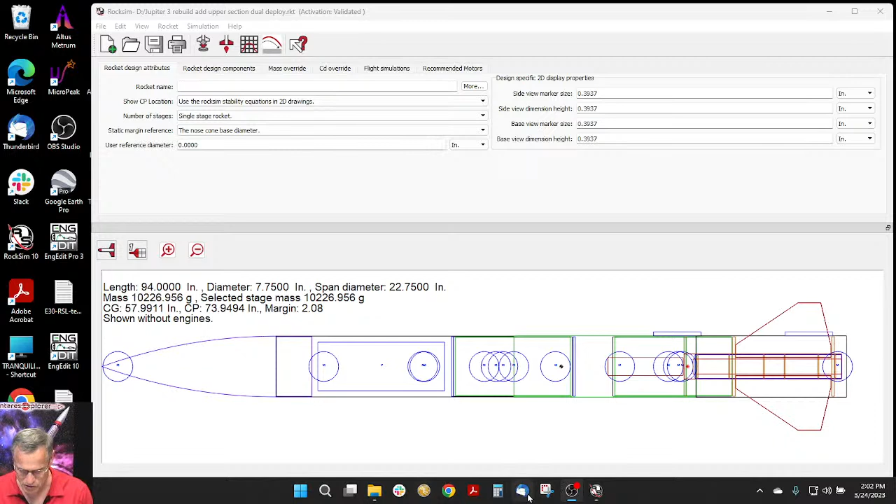Let's go to the Apogee website. Our website is apogeerockets.com. And I don't know, level 2. It's not showing up here. But it is, the page is on our website, it's just hidden. And I would have to make it live.

I could actually do that because I got my other computer over here. Let's see how long it takes me to do it. I have to log in. Type in level 2. And let's turn it to make it active. All right. It should be active here in just 1 second.

All right, let's try it again. Let's try doing level 2 again. There it is. Look at that. So if you just type in level 2 here in the search bar, you'll find the web page for it. Yeah, so this is what it looks like, which I just showed you. And if you click on it here, this was last Saturday.

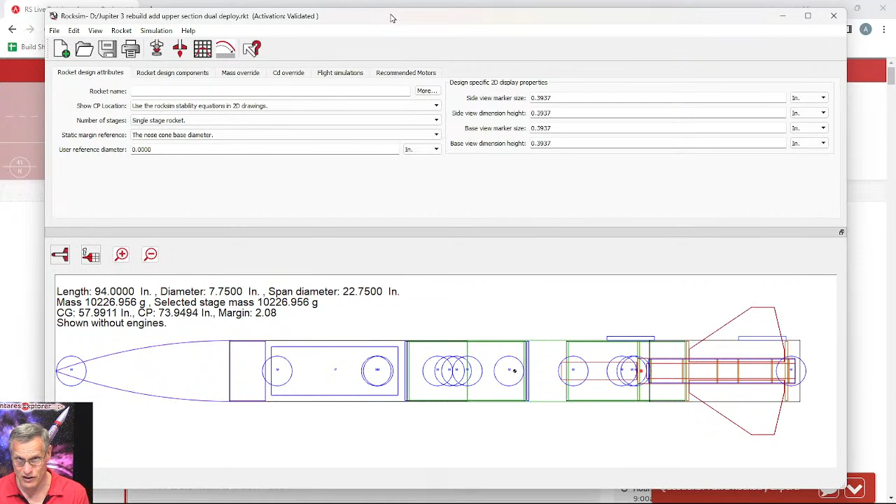RockSim is more of a trajectory program. If you already have the coefficient of drag, it can give you a better trajectory of that rocket. But you have to know the coefficient of drag first. RockSim will try to estimate the coefficient of drag, but it's not as accurate as you want it to be, just because figuring out coefficient of drag is so hard. Even NASA has a hard time doing it. That's why they still build wind tunnels and build prototypes before they go into production. They've got to verify everything, and one of those is coefficient of drag.

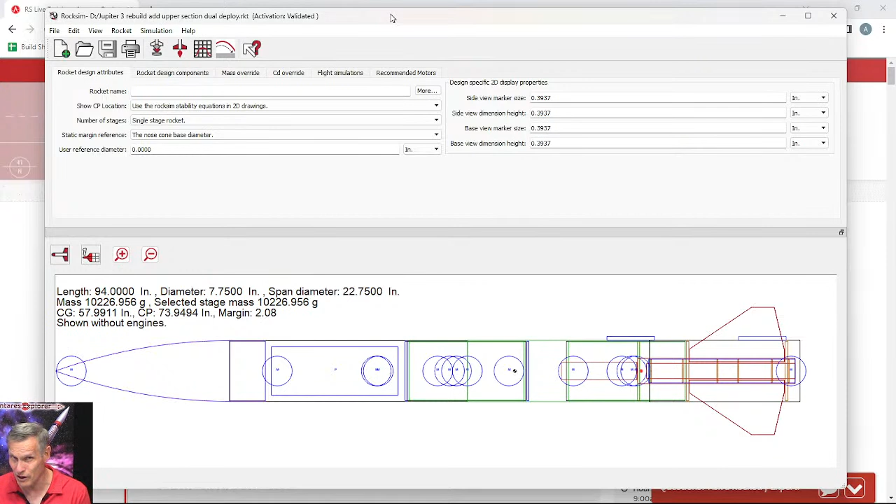And coefficient of drag is not a single number. It depends on a lot of things, like the speed of the rocket, the angle of attack, the shape. Is there a lot of interference, kind of like turbulence coming off of other parts that affects the part you're interested in, like on a boat tail? By the time the flow gets to the boat tail, it's probably already turbulent, and turbulent is different from laminar flow. It's just so hard to predict all that. So that kind of answers the question.

His second question is, if we manage to measure drag differences in shape somehow, is there a place in RockSim where we can put the coefficient of drag per part? The answer is no, not per part. You can do an overall drag coefficient, but it's not per part. If you wanted to do an overall drag coefficient, it's right here under CD override in RockSim. You just hit that tab. We have this rocket, and you have the CD for the sustainer alone, and then CDs for other parts, like booster stages. So it's a set of components, like a booster stage.

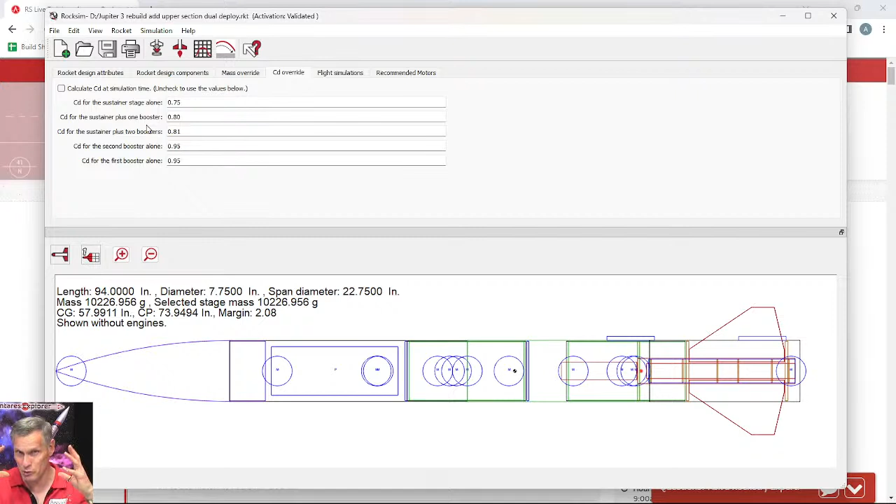Because as parts drop off of your rocket, you need to adjust the coefficient of drag. And I was just thinking about a new feature, and all of a sudden, how to add the feature just visualized in my head. So that was cool, Carlos. You just kind of triggered me with a new idea.

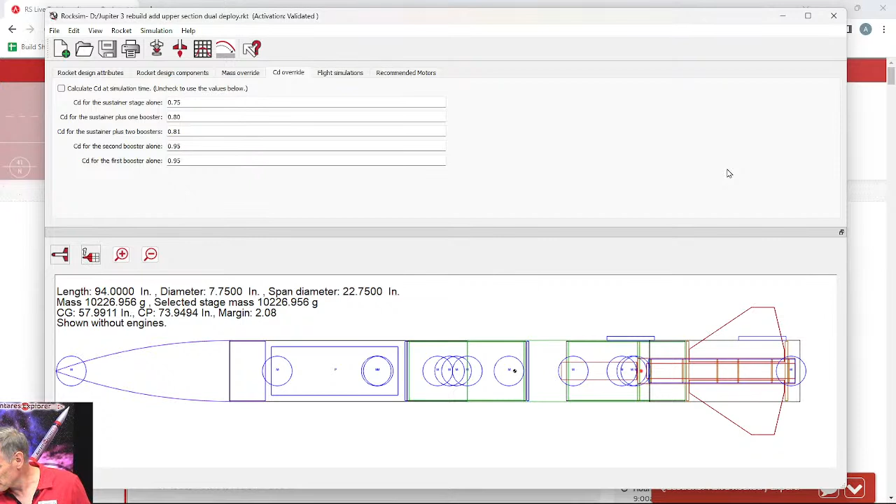We have Newtons per second, who is also here from Massachusetts. He writes, I need help with manually adjusting the CD override. So that's this right here. I built a custom rocket, Jupiter 3, and he sent it to me, and that's what it looks like. If we go to Rocket Design Attributes, let's give it a name, Jupiter 3. That is in article number 564 of your newsletter and secured my level 2 certification. So he's saying this is in number 564 of our newsletter.

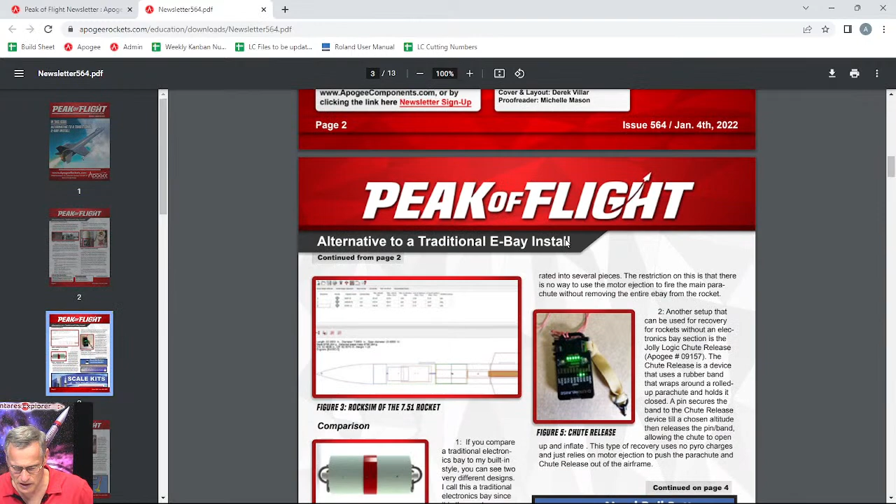So if you go to the Apogee website, go to How To and Guides and come down to Peak of Flight newsletter, he says it's in issue number 564. So you click on all newsletters, then scroll down. I'm looking for 564, and I am looking for the Jupiter 3 rocket. Okay, so it might be that one there, because I don't recall.

And just looking for the name Jupiter 3 as I'm scrolling through this. Let me scroll back up. All right, it's written by Joshua Drummond. Joshua didn't send me a photo of himself. He lives in Massachusetts. Coincidence with the Newton thrust for newtons per second.

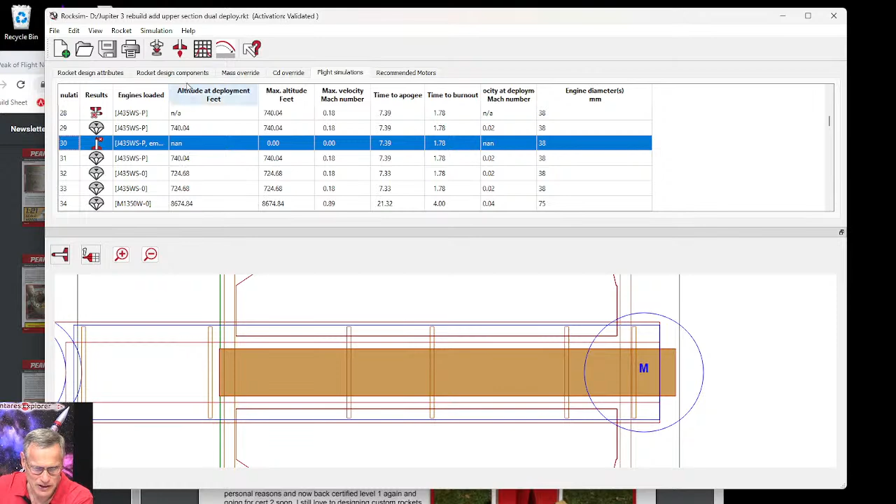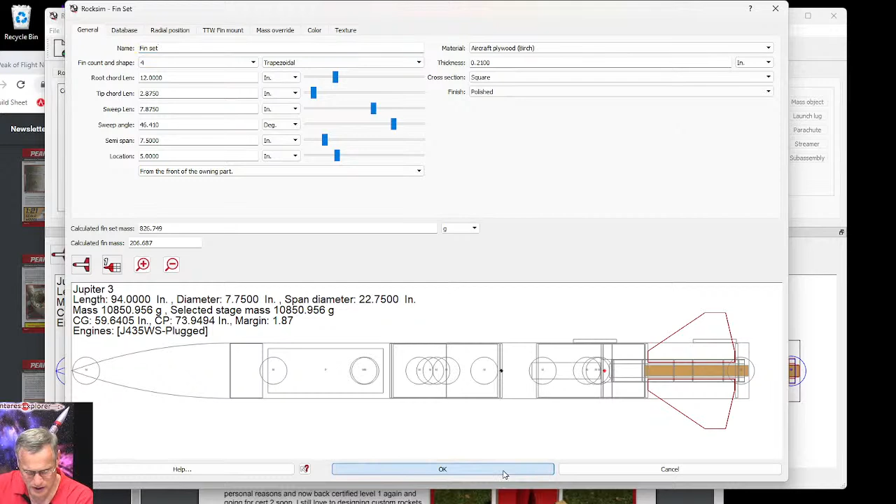So one of these parts is making us problems. And the only way to figure out which part it is, is to start deleting things and then see what causes it to work. So let's delete that. Yes, and then you run the simulation. Okay, still not working. And you go back here and you delete this. And then you run the simulation. Still not working. Let's delete the fins. Delete, yes, and run the simulation. Still not working.

See that? Oh, I guess it did work. It actually did work because it went 574 feet. I thought that was NAN. My eyes didn't catch that. That's NA for altitude at deployment, because it's not deploying because the parachute has no ejection charge to push it out. So let's open up a new design.

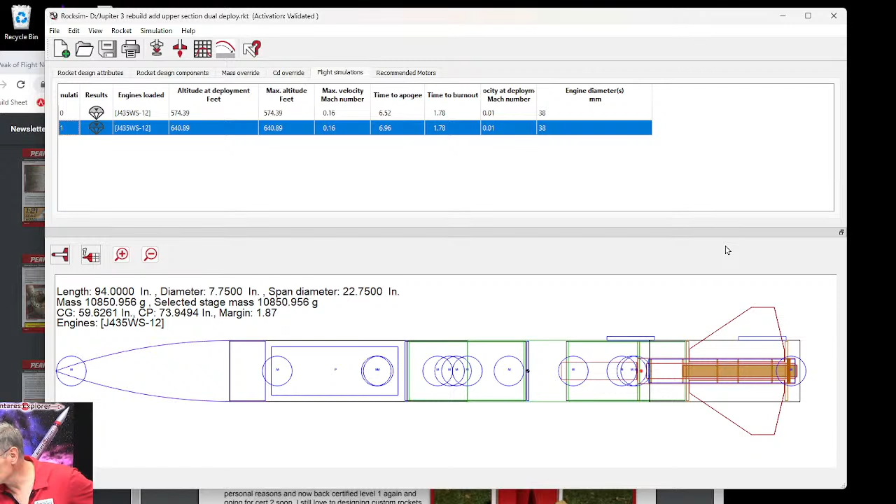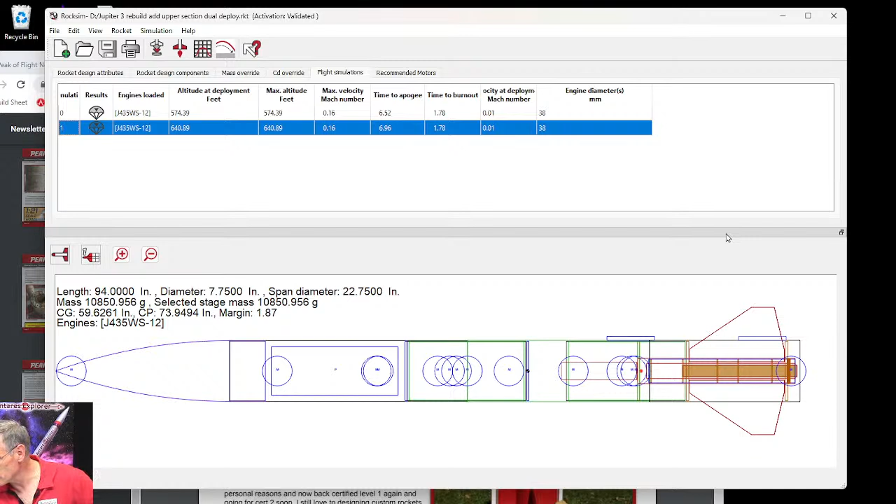It's got such a lot of stuff going on here in this text. My question is, does RockSim overestimate simulated altitude checking the CD override on with bigger diameter rockets? It shouldn't matter what the diameter is, except if it's short and stubby, because then you get a lot of base drag. This is going to have a lot of base drag just because it's big, but it's relatively long. It's more than 10 times the diameter. If you take 7.75, multiply it by 10, you get 77.5, and this is longer than that. So this is generally a long rocket.

Yeah, the question is, how accurate is RockSim calculating it? And this goes back to the very first question we had: is RockSim a CD calculation program? And the answer is no. It gets you in the ballpark. I mean, these numbers are in the ballpark. It's not like 10,000 feet versus 500 feet. So we're in the same area. It's just, now you're looking for like precision altitude. So now what you have to do is actually go out and fly it.

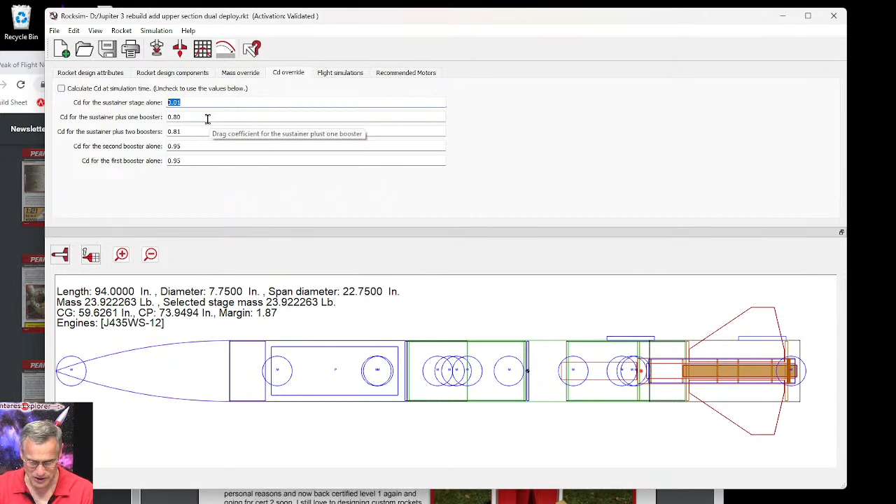Typically, for a typical rocket, you start at 0.75. That's just kind of like our starting point. That's the rule of thumb. Start at 0.75, and then we either work up or down from there. So if your rocket is going too high, then you increase the coefficient of drag. If the rocket's not going high enough, you lower it until it matches. So if I could get this number to match the altimeter, now I have that coefficient of drag

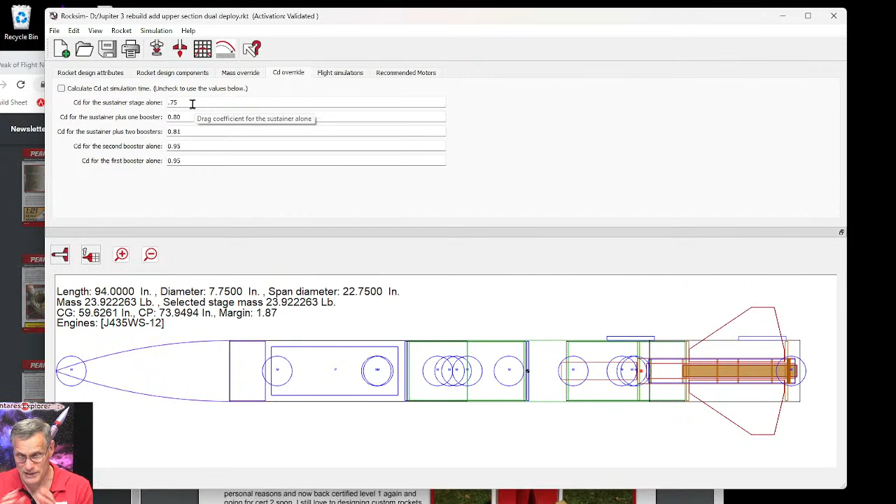pretty close. Like I said at the beginning of this episode, the coefficient of drag is not a static number. And what we're trying to do here is to force it into being a static number. But it's not. So let's run it again and launch it. 640 feet. So this is like the first one again.

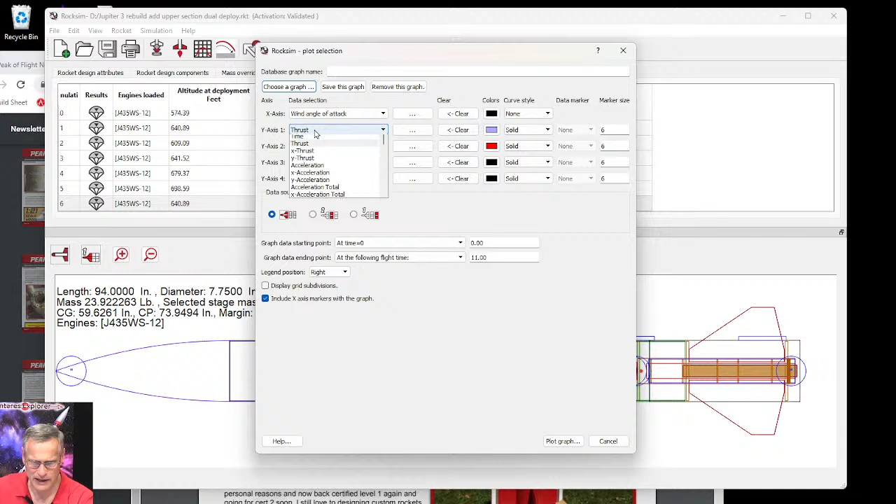If you go to plot over here, let's change the axis to wind angle of attack, and then we plot the CD. Let's clear this one. So on the bottom, we're going to have angle of attack. And when we plot the graph, let's see what it looks like. Okay, so CD is the blue line.

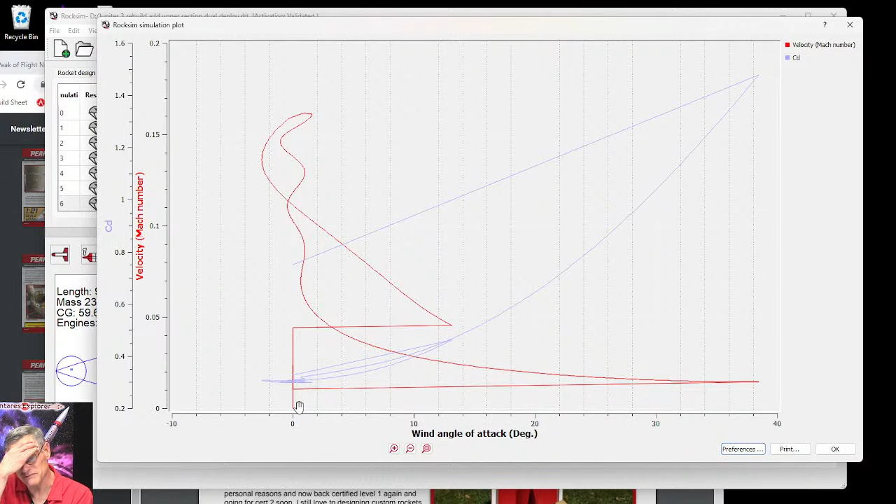Okay, so coefficient of drag is such a hard topic to talk about, and everybody wants to be so precise, and I understand that. You've got to worry about your waiver altitudes, and you can't break the waiver. So if your club has a waiver to 5,000 feet, your rocket can't go above that, or the club could get in trouble from the FAA. Because they have to keep rockets away from airplanes, and if you say I'm below 5,000 feet, then the FAA will have the airplanes fly higher than that, and they won't allow them to fly lower. So it goes both ways.

He says the design is for the L1000. Yeah, this is what happens when you write long emails. I get confused.

But what I said was right, that's the way you do it, and you were doing it correctly: you adjust that coefficient of drag until you can get as close to the altitude that your altimeter said the rocket was flying. And then fly the rocket, and your predicted altitude and your actual altitude should be closer. They're not going to be exact, because the rocket never flies the same way twice, because the wind is constantly changing, or you angled it into the wind or with the wind or in a different direction to compensate for the wind. And so now all your angles of attack change.

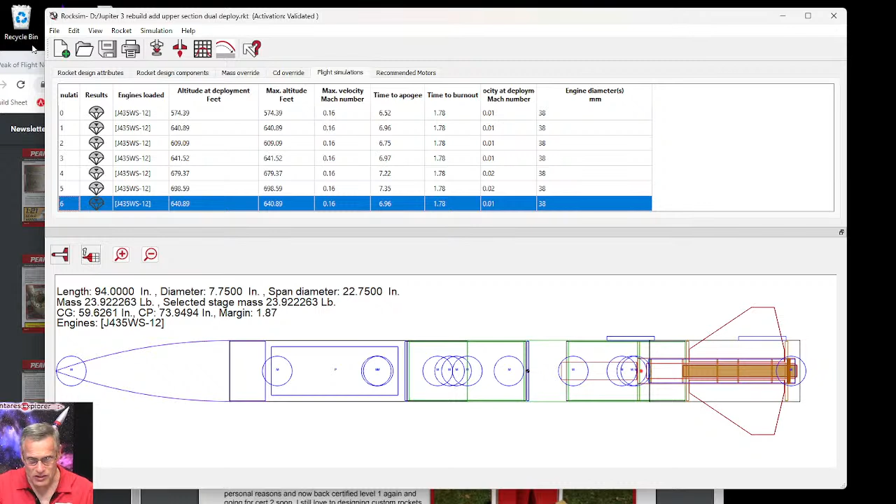Carlos says, will Apogee be selling an electronic recording device called the RockSim calibrator that gives us the numbers to get a correct CD? Well, they're called altimeters, and that's what we were talking about here, is you use an altimeter. But this is what a lot of people have asked for, is can you connect your altimeter directly into RockSim? And that would be really hard. It's not impossible, but really hard.

One thing we would have to do is make a specific altimeter that speaks the similar language to RockSim, because the way data is stored on altimeters, every altimeter stores the data differently. If you think of it like a spreadsheet, column A might be time and column B might be altitude, but a different altimeter might have those reversed, or they might have acceleration in column A versus column B.

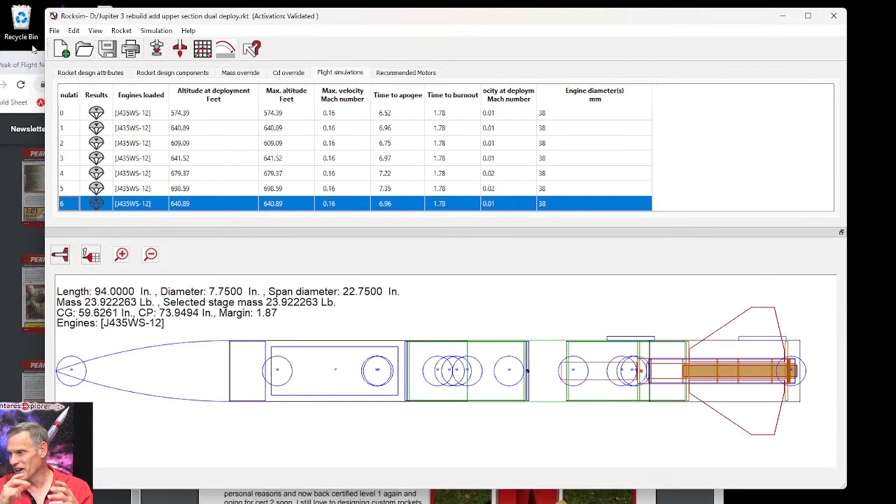And so a future version of RockSim would need to know exactly where the data is. And the only way to make sure is to have a dedicated altimeter that's designed specifically. And Carlos calls it a RockSim calibrator, which is not a bad name. So then you would input an altitude in RockSim, and then RockSim would have to have a little program that would adjust the coefficient of drag until it matched that altimeter reading.

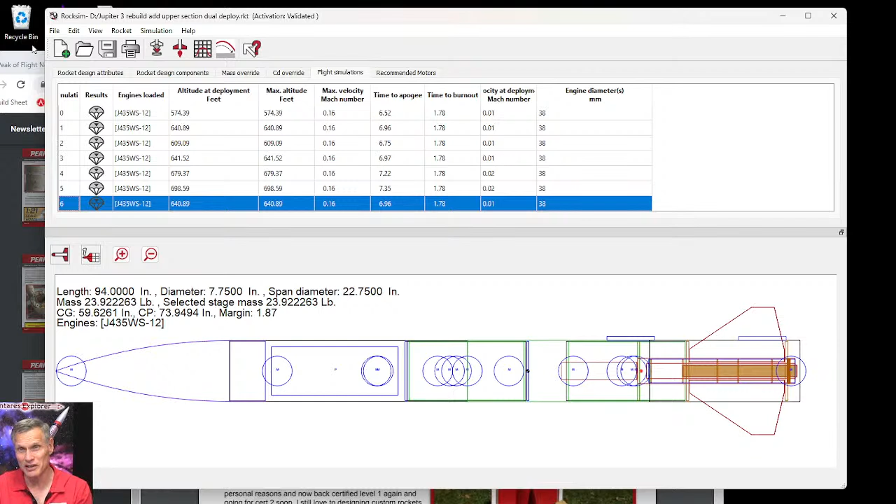The easier part would be just to have that little algorithm already built into RockSim, and this is something that we are thinking about doing. That would find that coefficient of drag, the CD override value here.

It wouldn't be perfect, like I said, because every time you launch the rocket, it's different, because there's different wind conditions, different temperatures, different barometric pressure. Your launch angle might not be exactly the same. Where you launch will affect it. If you launch at the equator versus at the North Pole, that's going to make a difference in altitude. So there's a lot of stuff going on.

Terry says TMI, which means Tim mentally incapacitated. Oh boy, I think it's gotten that bad. All right, cool.

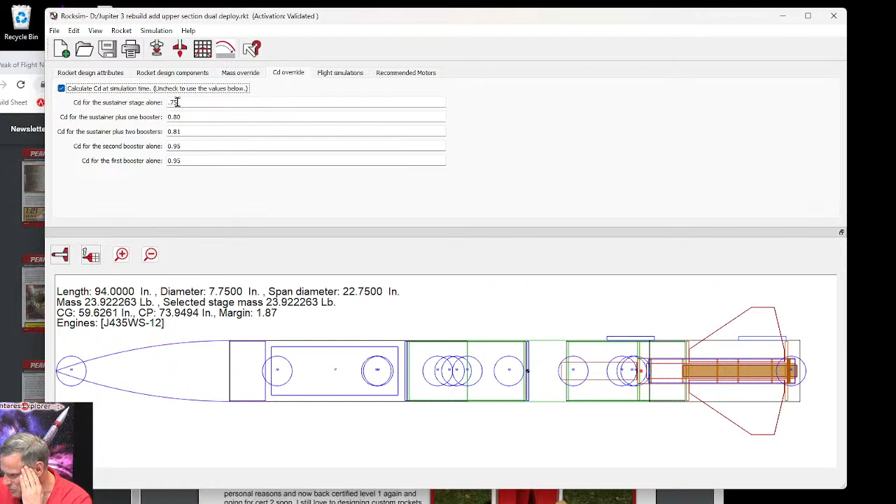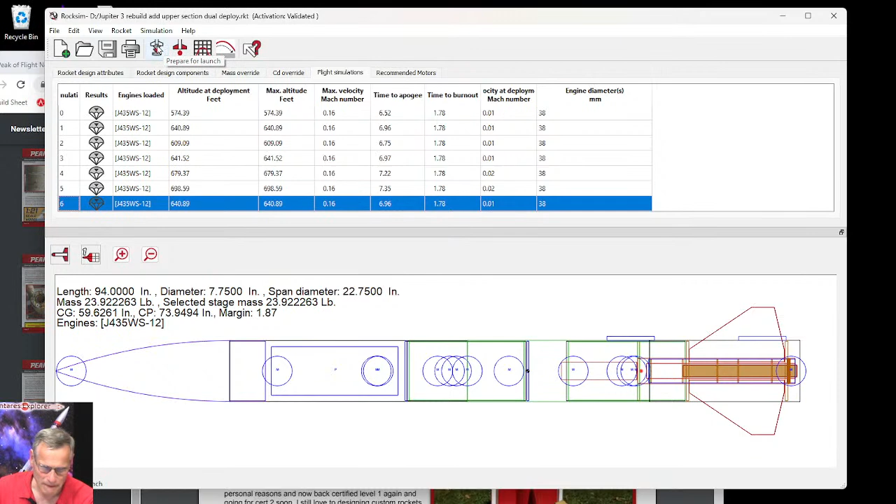Newtons per second says the I-1000 was showing 2,900 feet or 4,500 feet unchecked by the CD override. Oh, that was not an I-1000, an L-1000. Okay, so let's unload that. Let's go here. It's showing 76 millimeter, but we can show all the engines that are smaller. Let's go down to the L. So I'm just going to scroll down until I get to the L1000.

J, K, L. Let's double check, make sure I'm seeing these in the correct order. J, K. I'm not seeing an L1000. How come I'm not seeing an L1000? Oh, there it is. Plugged. Let's use 18. Click OK. Click OK. So there's the L1000. And we're going to let RockSim calculate it and launch it.

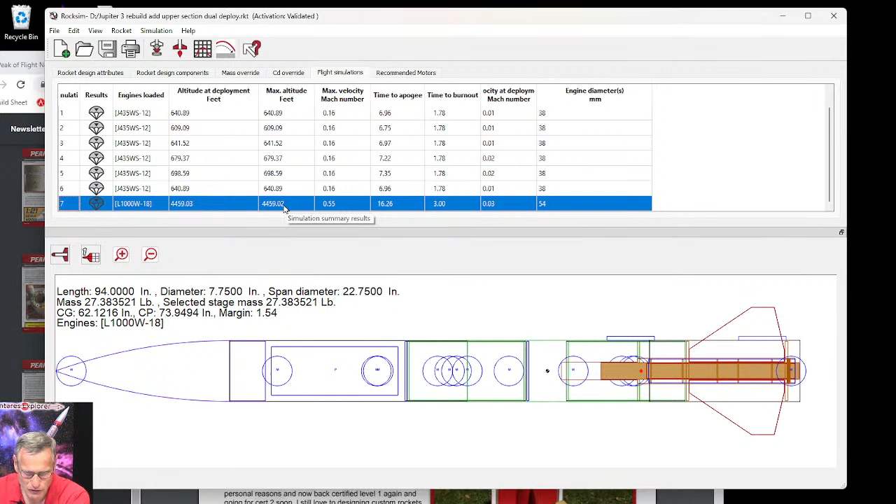You got close to 4,500 feet. Okay, so that's what he says. And then he did a CD override and launched it. So we're using 0.75 and launched it. And he got close to 2,900 feet. All right, so that's just 2 data points. That's with a fixed CD and a RockSim calculated CD. But what did the actual altimeter say?

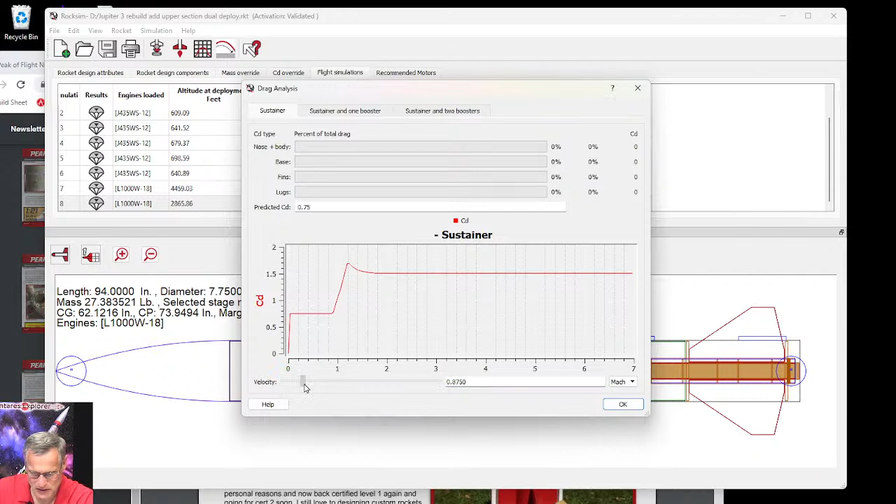Let's see. So we'll go into Rocket, and you can do a CD analysis up here. I want to go like Mach 0.5. So he's getting a maximum velocity of around 0.55. So I've got 0.55 and hit tab. And it's not calculating anything. Let's see. Oh, because I'm using a fixed number. So let me uncheck that, and then go back here to CD analysis.

There we go. So if I go 0.55, it says that most of the drag is coming from the nose and the body, and we're getting some base drag here. About 32% of our drag is from the base drag, and then the fins create some drag, and the launch lugs are negligible. I'm just trying to figure out if there's anything that we can do.

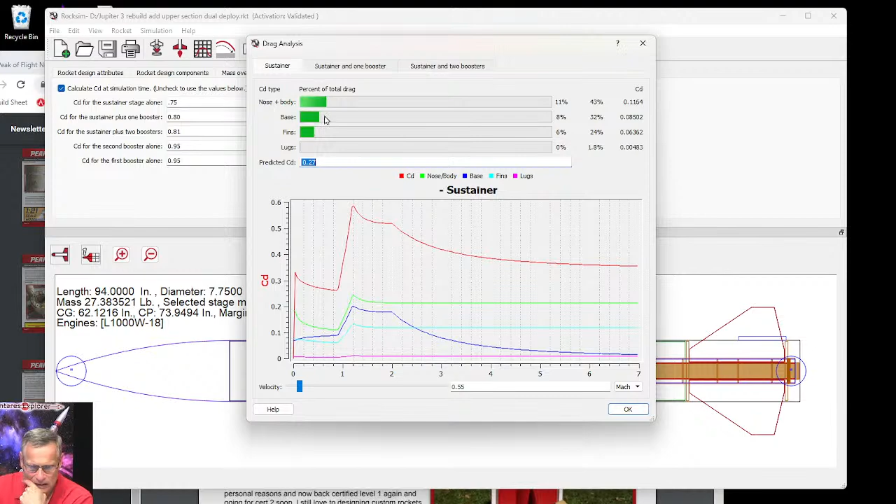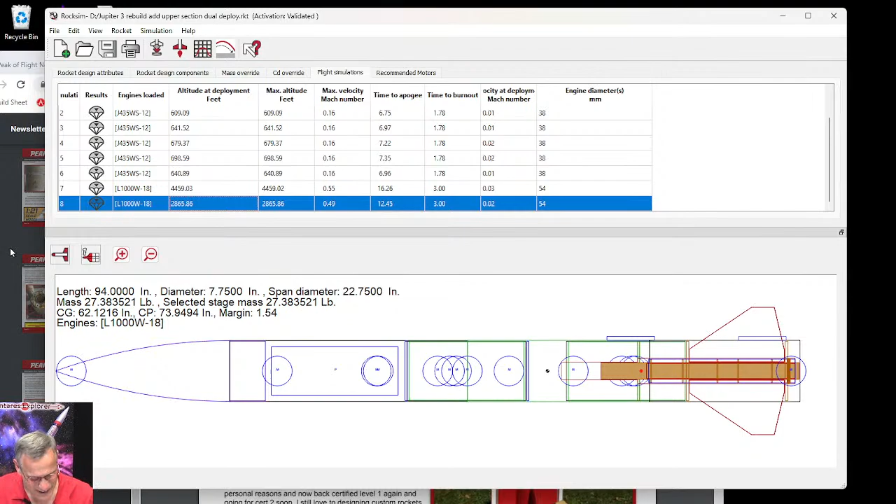So one was with the CD RockSim calculated, and this one was with a fixed CD. So maybe this is one of those cases where we're getting a lot of base drag and RockSim's not calculating it. Okay. And maybe it's shorter than I thought.

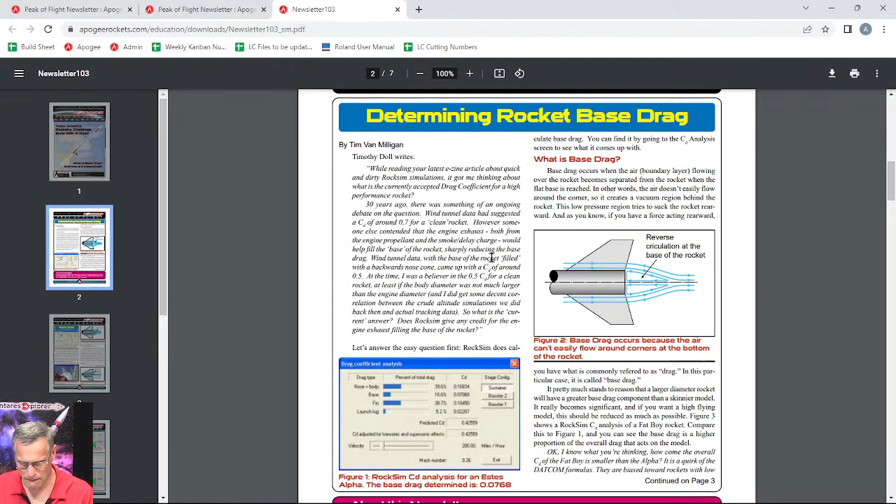Okay, so if you go back to the Apogee website and you go to How-To and Guides and go to Peak of Flight newsletter, go to all newsletters. What I'm looking for here is there's an article on this, and we're going to do a Control F to do a find. We're going to type in base drag, issue number 103. Let's see if this is the one. Determining base drag.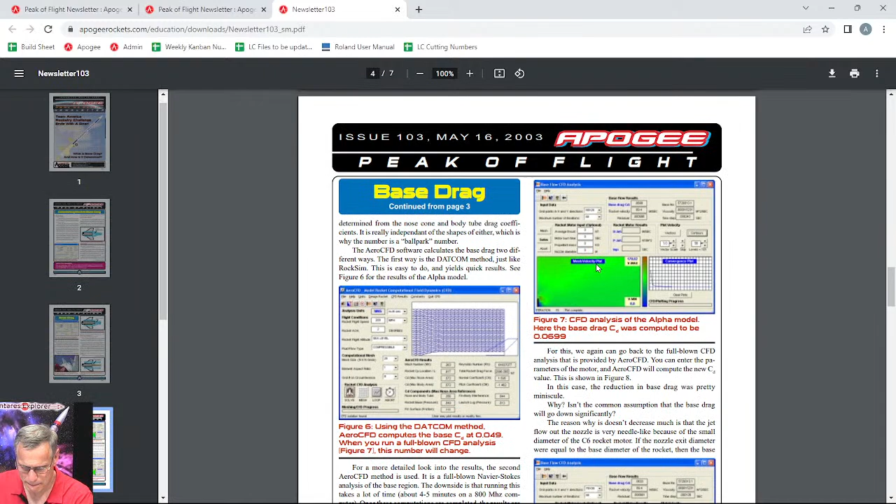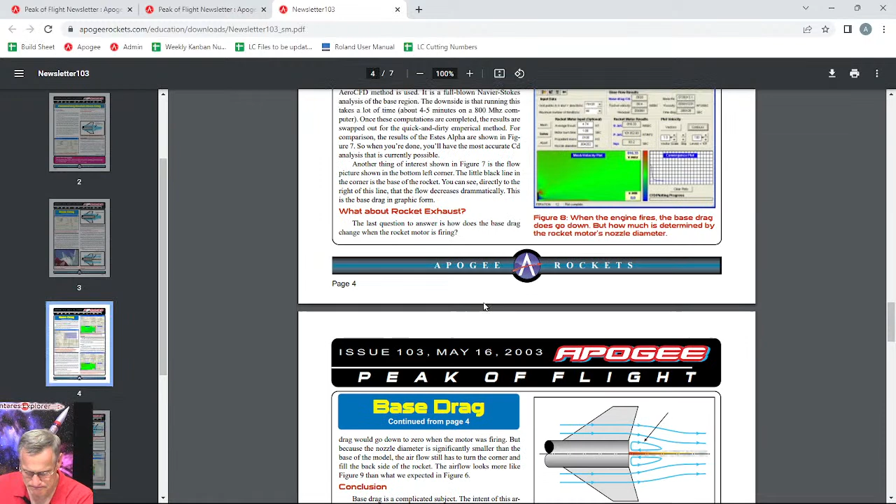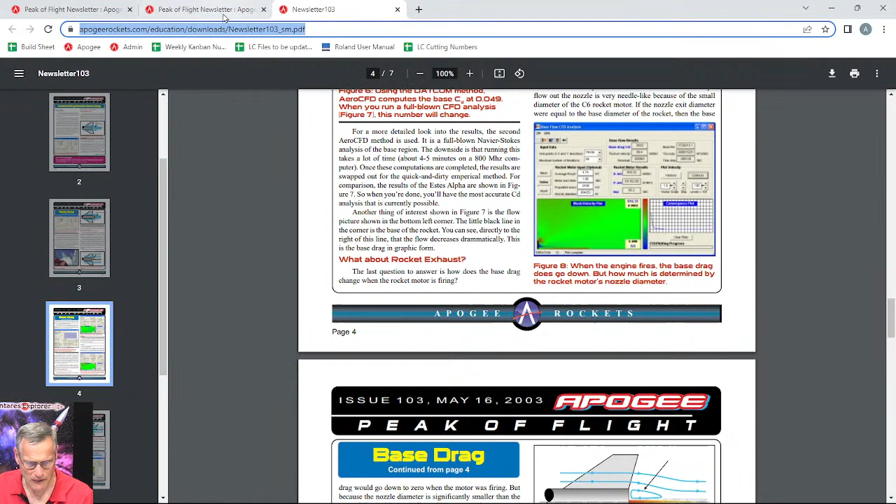Yeah, we used to have a program called CFD analysis, but that program died a long time ago. Let's go back. How do you get out of here? Let's type in short. Here we go. Stability. That's stability.

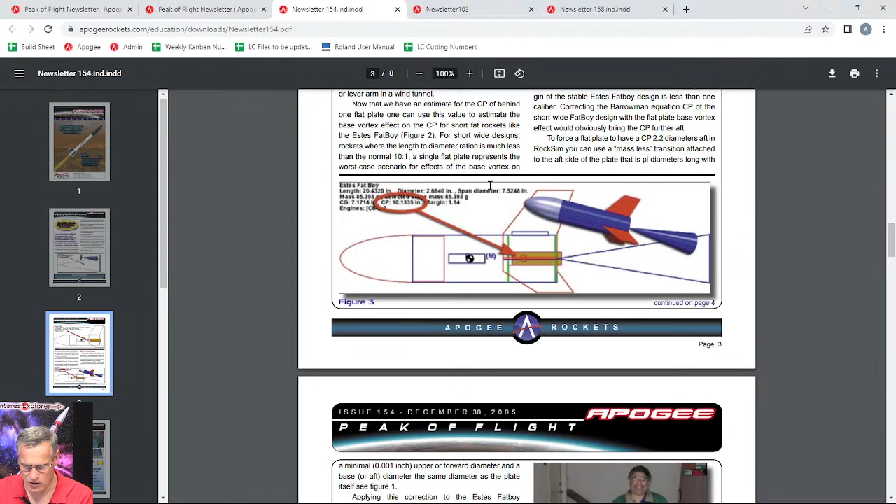Okay. Issues number 154 and issues number 158. I'm going to open these up. So this is issue number 154. This is an article written by Bruce Levinson, and what he suggested we do is to add a cone on the back of the rocket that will increase the base drag of the rocket so that it will match your altimeter measurement. And then he continues it in issue number 158.

He says, do this for rockets with less than 10-to-1 length to diameter ratio. Even though this rocket is a little bit greater than 10-to-1, you might want to try this technique. Yeah, I haven't read this in a long time. If you read this article, it might help you out. And he says, I'm extending the Jupiter 3 and the RockSim file showing what it will look like soon flying on an L1000.

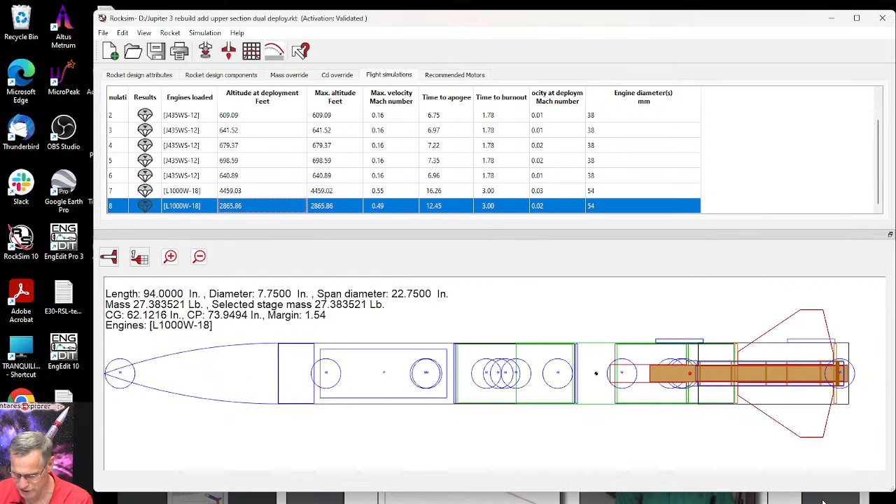Okay, so I don't know if this is the current configuration. He says he was going to increase the length. Yeah, he's talking about a new article. I'm not sure which new article. Which article was that? Was it like 564? 563? Let's see what that article number was again. 564.

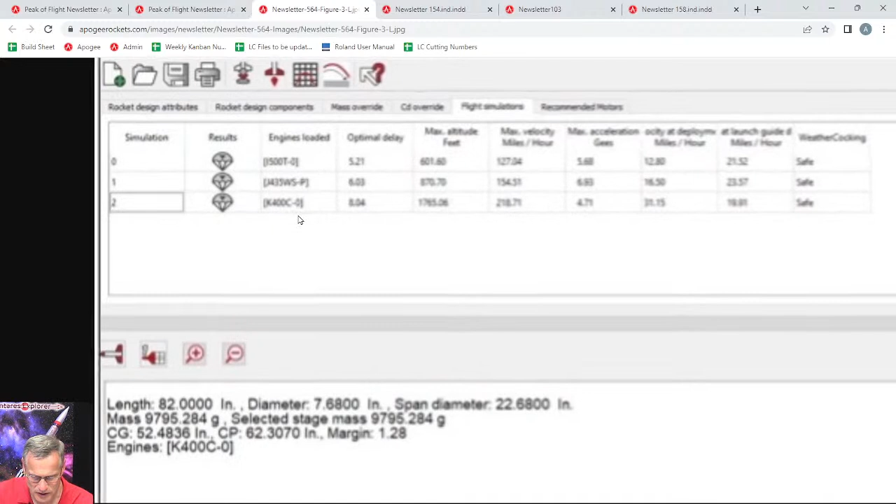So he had the rocket and it was shorter. And I can't see what this is. It's really hard to read. Okay. This was 9,000 grams instead of being over 10,000. Okay, so yeah, when your rockets get short because of base drag, do that technique in issue number 158. That's weird that it's shown as an InDesign file. Any other questions?

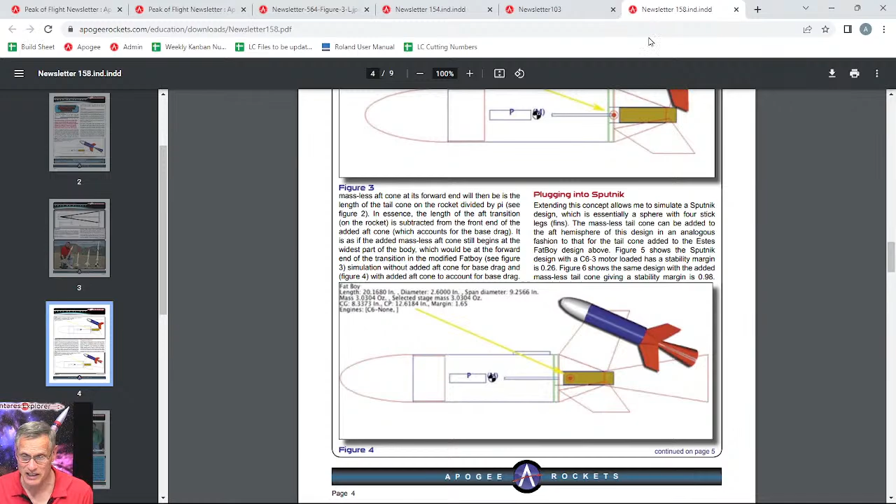Oh, this was written by Bruce, and Bruce unfortunately has passed away. He was great. He wrote a lot of really good articles for me. He was smart. He was just playing with RockSim, trying to get his CD numbers to match, which is how he came up with adding a cone on the bottom of the rocket to increase the coefficient of drag.

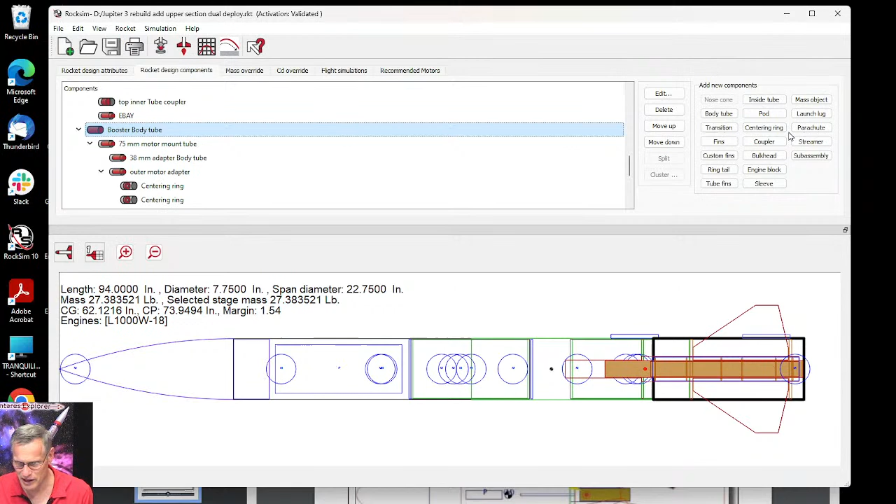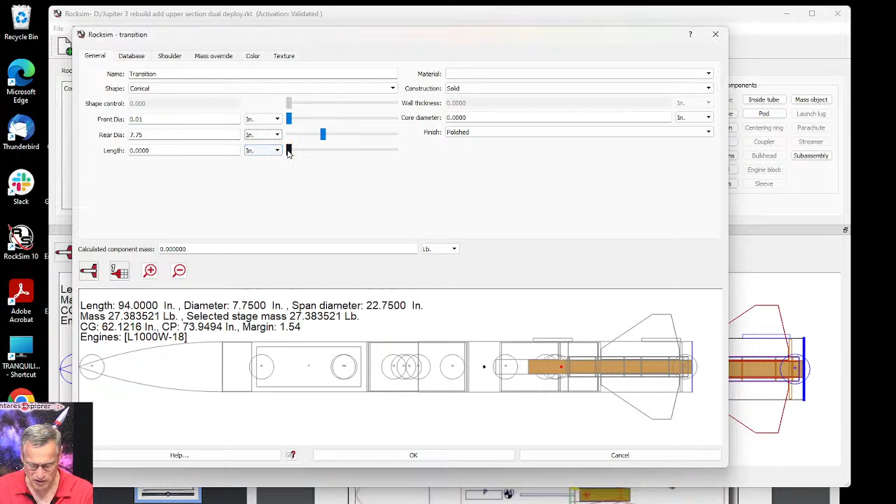So what you would do is go down to the last component here and add a transition. And I'm going to cancel out of there, and the front diameter, 0.01, the rear diameter, I don't know what he says in the article. It's been such a long time, but it might be 7.75. And then it has a length. You can see we're adding a cone to it. And you can probably make it out of something really lightweight, paper, hollow, with a wall thickness of really thin, so it doesn't add a lot of weight.

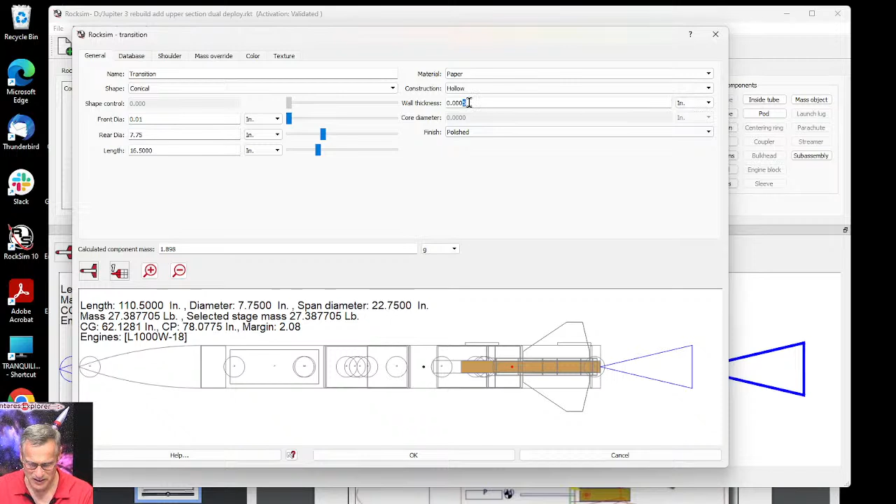So now I'm adding 2 grams, and I can make it even smaller. 1 gram, 0.3 grams. That's like less than a paper clip. And then click OK. And then you do the CD analysis again. And we were at Mach 0.55. Hit Tab. My base drag didn't go up hardly any. Actually went down. Yeah. So you can play around with things like that.

Okay, I got more questions. We've been talking about drag today. It's such a hard topic to talk about. I'm doing a lot of arm waving.

Chuck Garn says, Tim, checking in from the wife's hospital room. Is that from the wife's hospital room? I hope she's doing well or getting better. Or if you're asking me what the number of her room is, I don't know. It's 4.

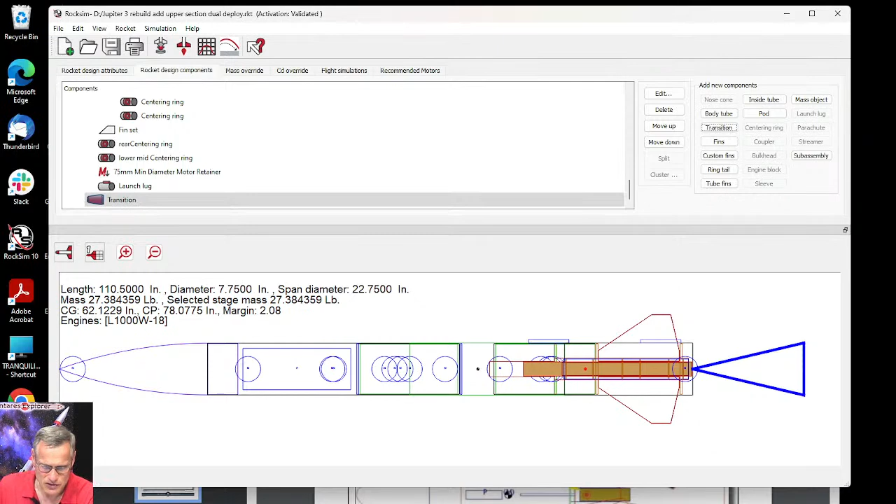Okay, Sturko3 says, what would cause a rocket build and then not showing up in the simulation window, no rocket visible to launch? So it's kind of like he's going to launch it. He goes to prepare for launch, and he does a flight profile, and there's no rocket sitting here.

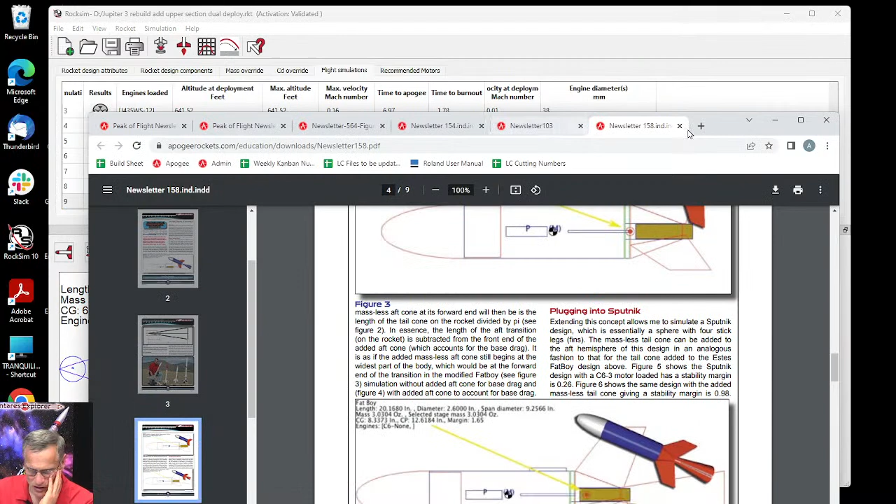If there's nothing showing here, then there's probably nothing here as well. And that's that issue of something is causing RockSim not to run the simulation. Because if there was a simulation, it would show up there. The other thing that you can do is to upload the design to the launch visualizer. Can I open the launch visualizer here? The launch visualizer is rocksim.com.

Let's see. Can log in. Oh, good. My account is in this computer. Okay. You can upload a new design. I can browse for the design. And then he sent it to me and I put it on the USB drive, the Jupiter 3. Open. And then upload it.

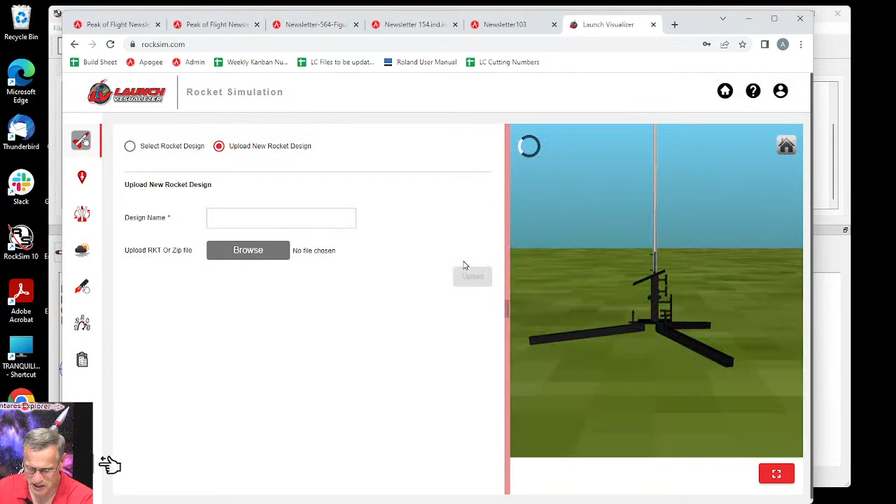And this is a big file. And it's uploading forever because all those simulations add a lot of memory. And it's taken a long time to draw it. So there's the Jupiter 3 rocket sitting on the launch pad. This blue dot here, that's a mass object that's hanging outside the rocket.

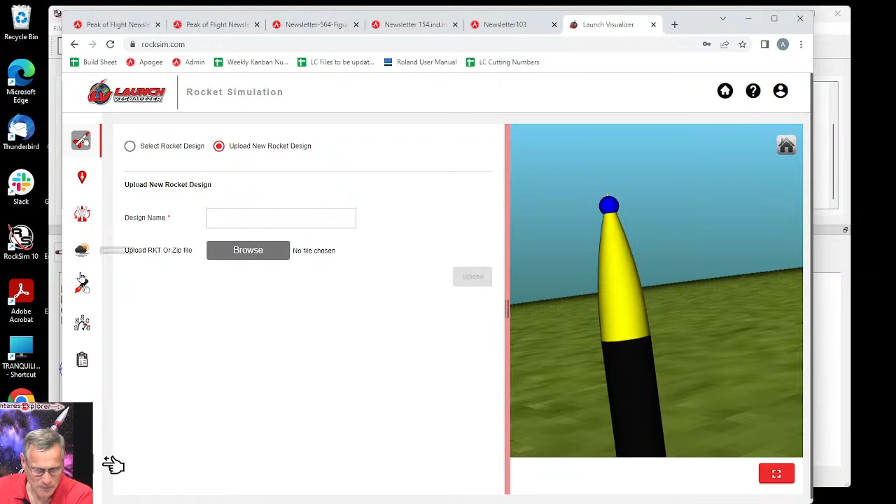That's interesting. And then you can go and select the launch site. So I'm going to choose a launch site here. And he's in Massachusetts. I don't think there's... Central Massachusetts Space Modeling Society. And it's going to load the map of where this launch site is. I don't think this is going to be a high power capable launch site. Probably not. There's a field there, but it's surrounded by a lot of trees. So I probably wouldn't launch there in Massachusetts.

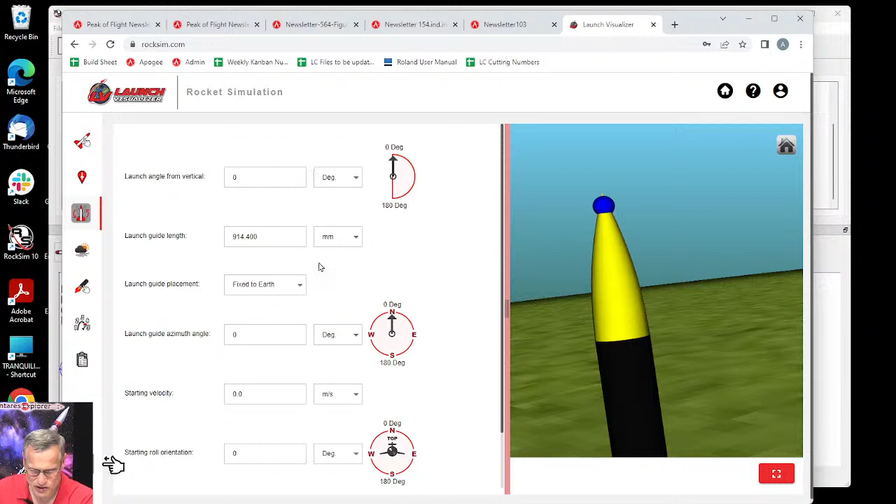Maybe he's launching here. What's this launch site? Kearsarge Area Rocket Society. That's not much bigger. There's not a lot of houses, but there's still a lot of trees. And you would go to launch. We'll go launch straight up and give it a wind of, this is 5 miles an hour from the west.

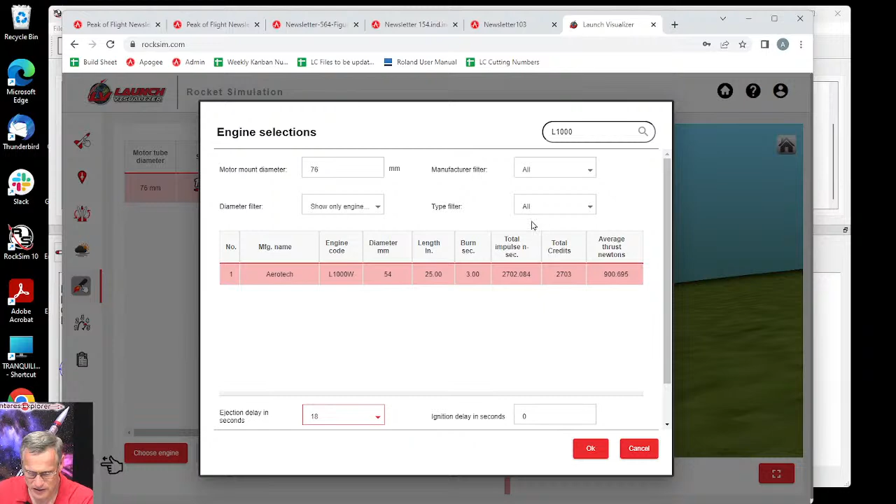Okay, and then the motor, we're going to choose that L1000 here in the launch visualizer. It's not finding. There it is, because it's a 54, not a 76. And ejection delay, we'll say 18. Click OK. And deploy the parachute at max ejection, and we'll launch it. Confirm the launch site, say yes, and simulate. I think I chose that launch site. It's running. Let's see what RockSim Pro says.

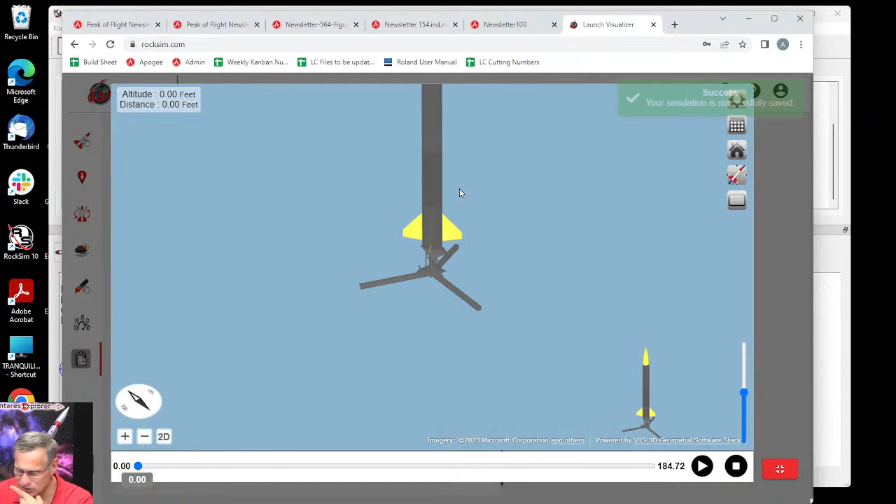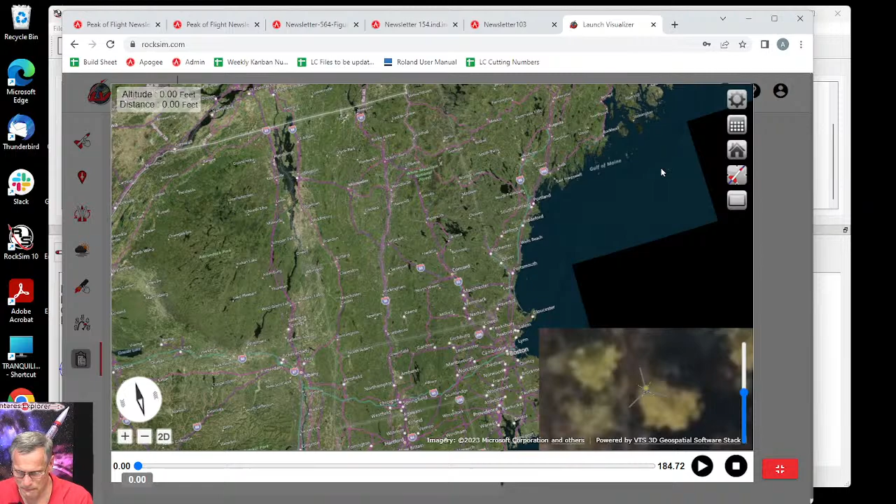Okay, so there's a rocket on the pad. And whatever I picked, right in the middle of a bunch of trees. There's a lot of trees in here. This is not a good launch site. That's in New Hampshire. Okay, well it's in the forest. Let me go to this view, and it will zoom back in. The rocket should be right here in the middle. And when we launch it, there it is. It took off, and it's going 1,800 feet, and it's still going up.

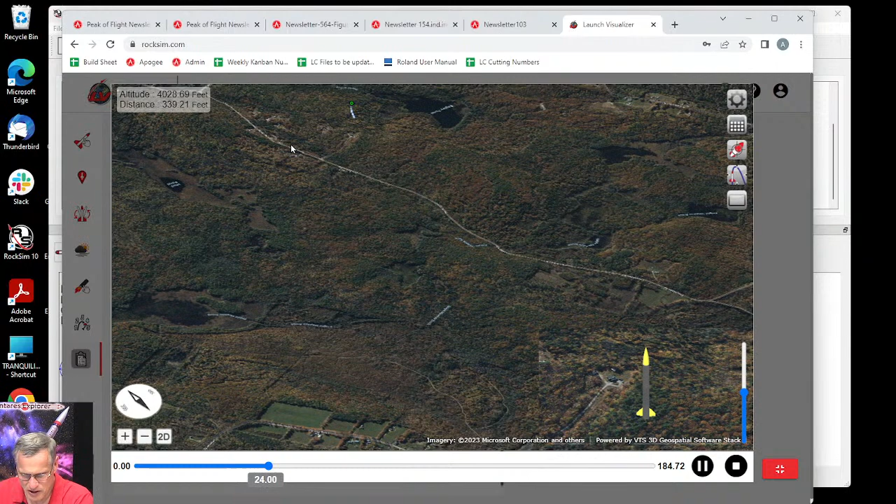It's way up here, and the parachute should be coming out right there. And now it's drifting down. Let me get a plot here. Let me see the path and extrude it to the ground. Okay, so there's our launch site in the trees. The rocket went way up. What happened to my cursor? Went way up to there, and now it's coming down, and it stays in the air 184 seconds.

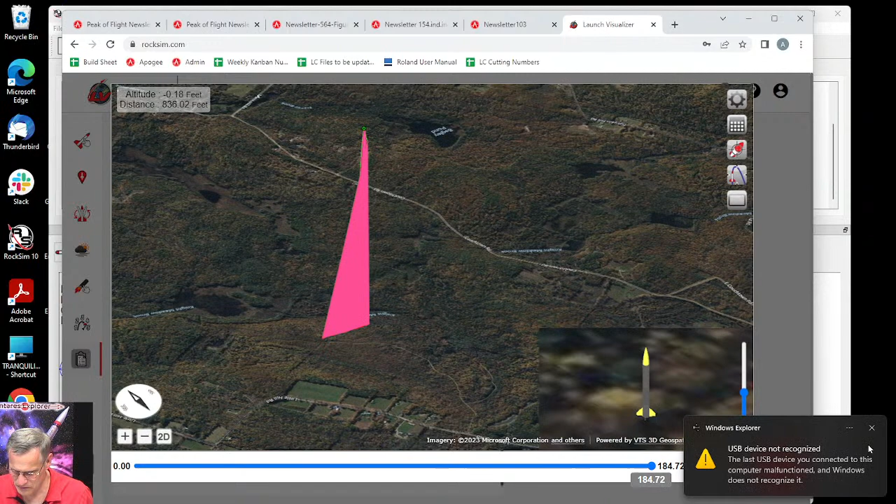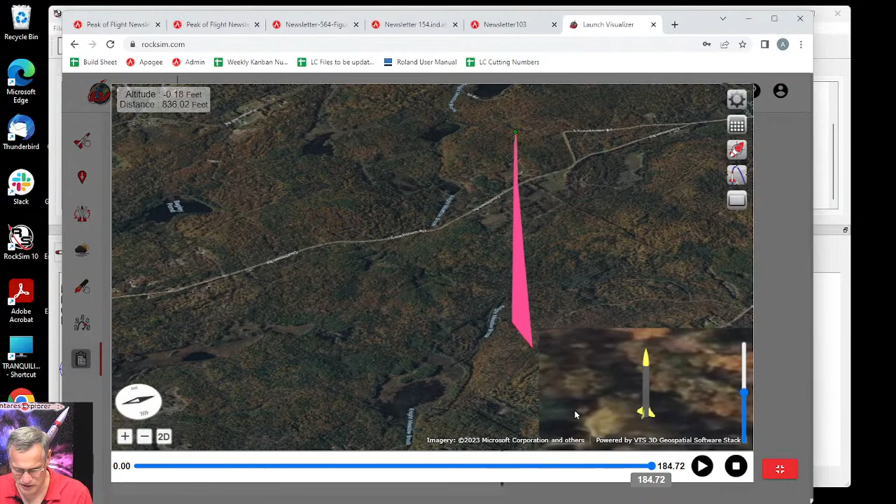Doesn't like this USB device. Yeah, so that one's landing. Started in the trees and it landed in the trees. Not the best launch site. Okay.

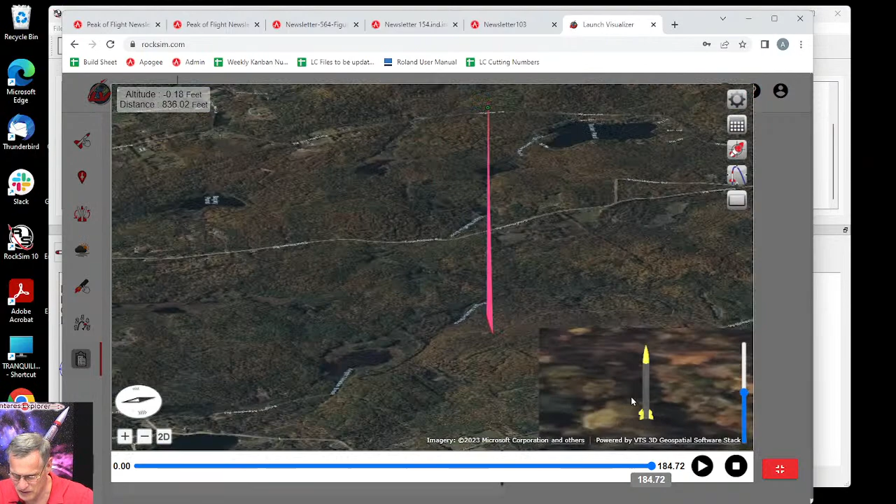Any other questions? Terry Wheelock says, use an Apogee RC parachute. Yay! Newtons per second says he's launching from Amesbury, Massachusetts. Or Rima in Rhode Island. So, where's my cursor? I lost my cursor. My mouse has died. The trackpad still works. He says Amesbury. Let's try Rima. I'm not seeing Rima either.

Anyway, that's how you use it. You could try it in a launch. If your rocket's not loading into RockSim in the 2D flight profile, try the launch visualizer at rocksim.com. See if it's working there. I do that just to troubleshoot something. You know, I don't know what that would tell you, but it would tell you that something's working somewhere.